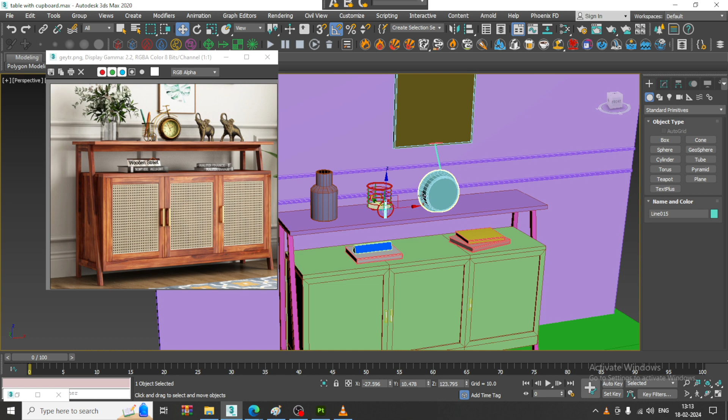Let's get started. As you can see, we have almost finished unwrapping here, with a few things left to cover. Let's select this, give it an unwrap UVW modifier, and assign it. Open the UV editor, select the polygons, go into mapping, and choose flatten mapping. Click OK, then go into tools and pack UVs.

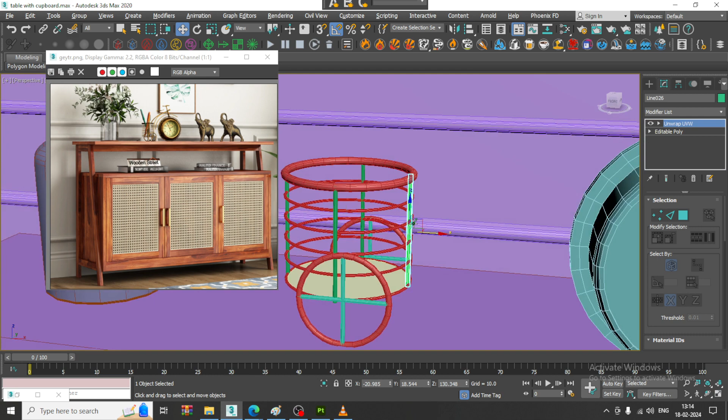Select this, delete this. I'll make a copy of it, press shift and drag. Let's make a copy, select this, again give unwrap UVW, open the UV editor, select the polygon, give flatten mapping, go into tools, and pack UVs.

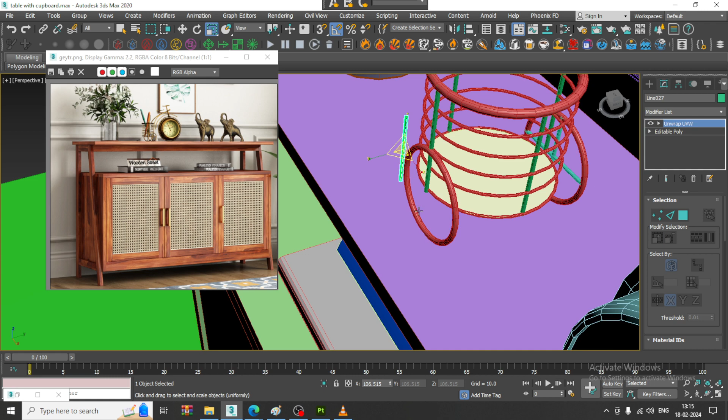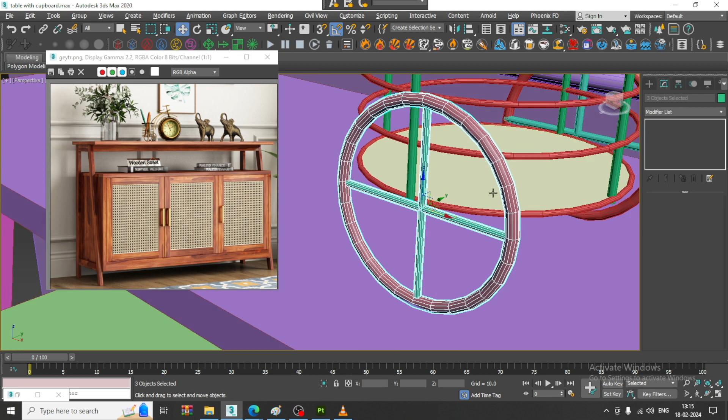Select this, delete it, drag it over here, resize it, push it up. Slightly drag it down, rotate it. Select this again, delete this, select this, shift and drag to make a copy of it.

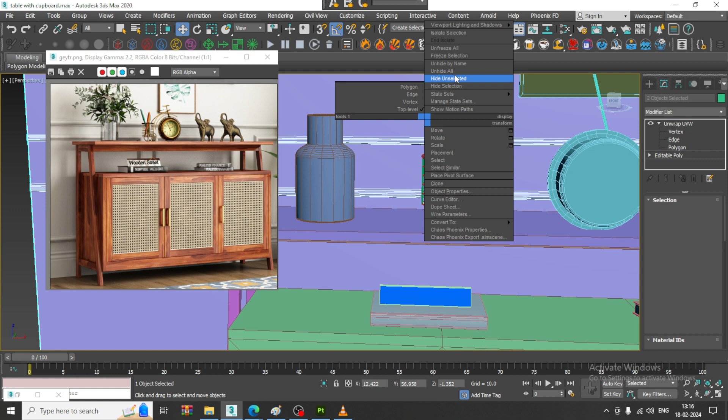Select the whole thing, I'll freeze it for a while, and let's group this. Go into the material, standard, and assign a color to it.

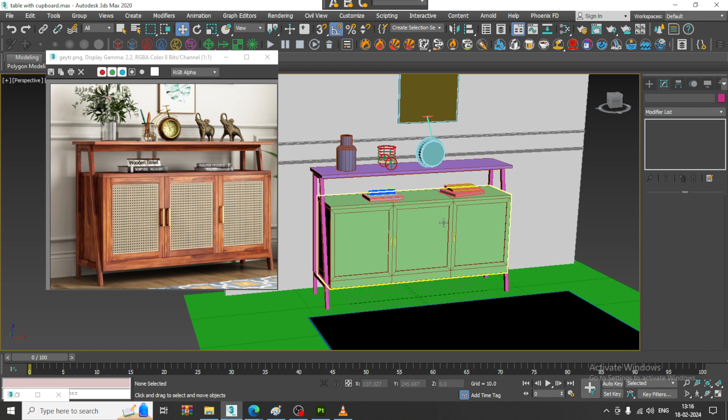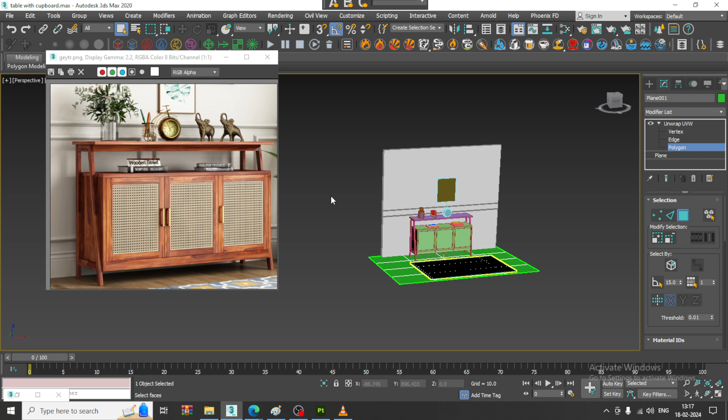Once this is all done, select the whole thing. We can go into file. Hope we have not unwrapped this - so unwrap this as well over here. Select the polygons, quick planar map, open UV editor.

Go into tools, pack UVs, unfreeze all, go into file, export selected. I'll export this in FBX format. Let's export it.

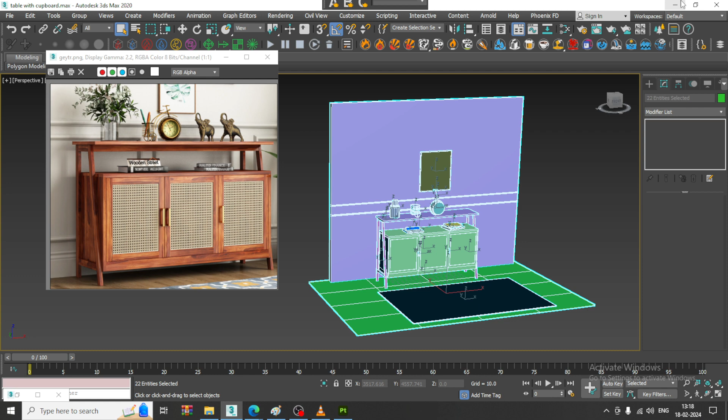Let's go over here, open the application Substance Painter. Let's take a new file over here. It's getting opened up.

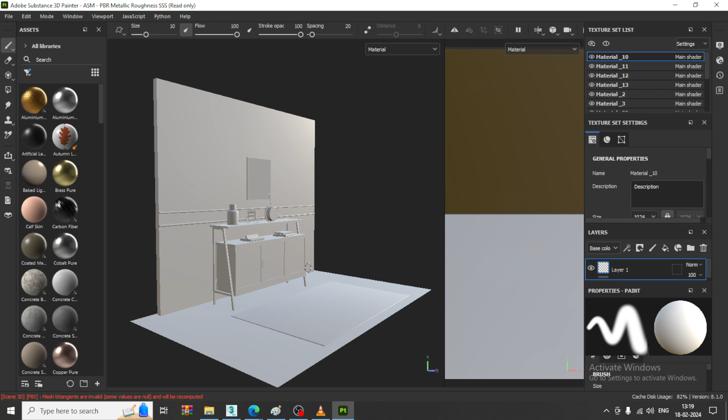Let's select this and call it. As you can see now, we have imported this stuff over here. We can rename this - it's very important that you rename all these elements. Let's double click it, say rug.

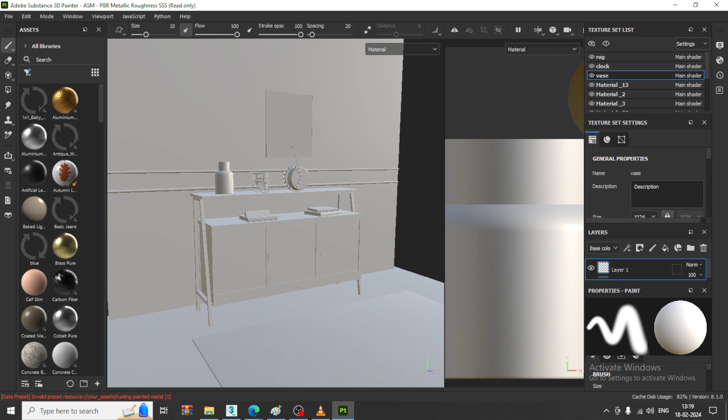I think this is a support, the handles, main table, the top, show, wall - you can just rename all these elements one by one. Book 1, book 2, book 3, nameplate, and the frame. I think we have missed out something.

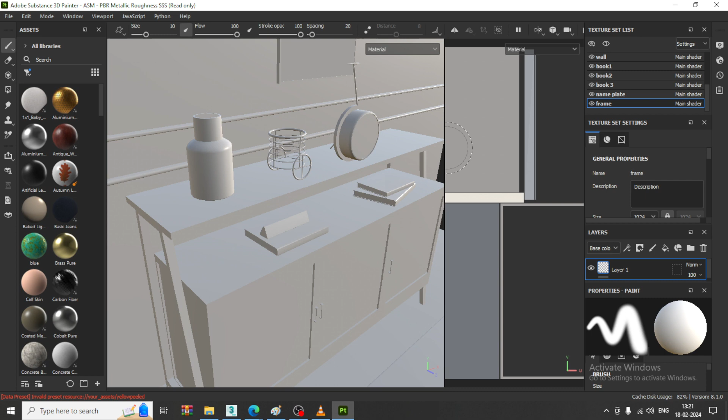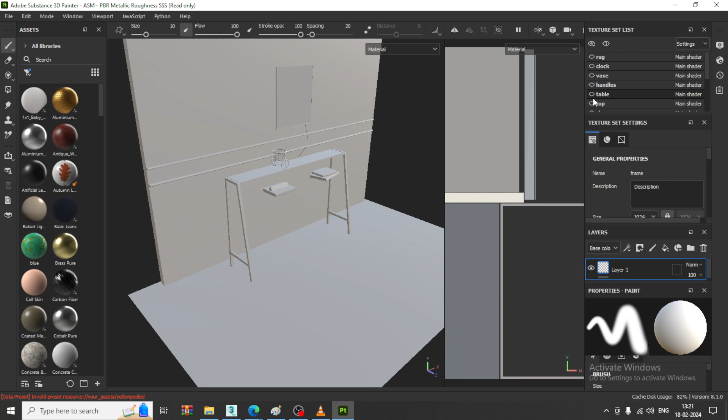Oh, it's taken as a whole element, so I haven't given any color to it. We'll definitely separate it later, or you can do it right now as well. So I have not separated it - you can separate this. So you can just separate this.

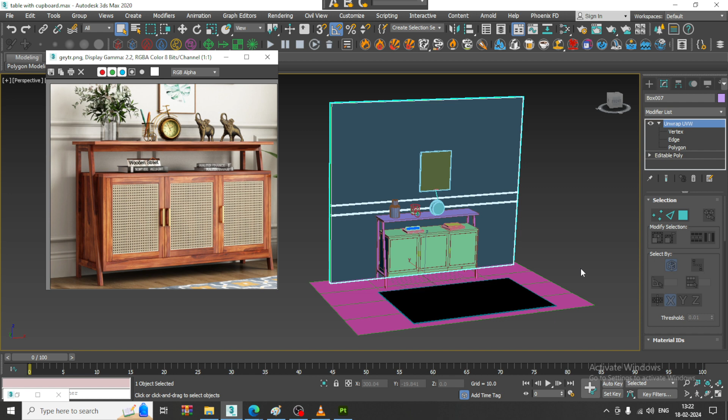Now you can again select the whole thing. Let's again click on export, selected, and let's name it table underscore 1. Save it in FBX format. Click OK, let's go to Substance Painter.

Let's click on new, select table 1. I'll discard this. Now I get this correct stuff. Now you get this rug, clock.

You can just rename all this - handles, even you can rename it over there as well - table, table, top. So that's your floor.

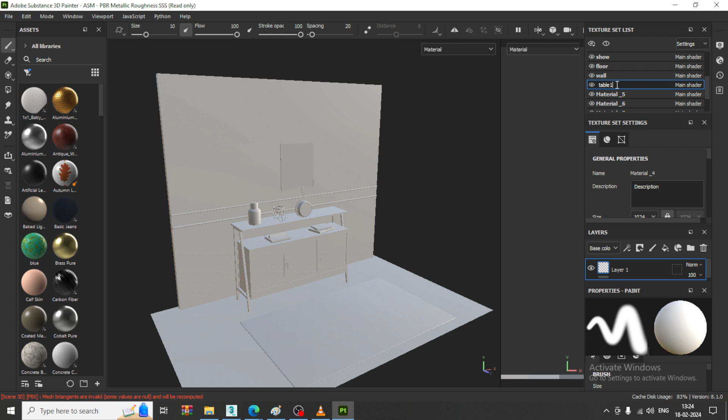Wall, table 1 - so you have unwrapped this. As you can see, we have done this again. Name it as book 2, book 3, nameplate, frame.

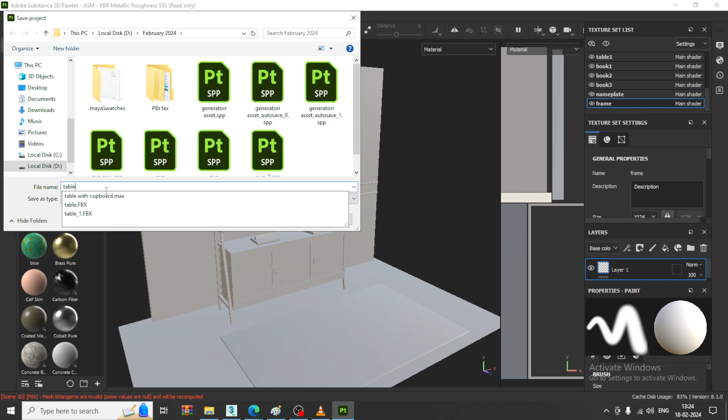I'll just save this file once over here. Table with cupboard. So what we can do is create a texture and assign it, or even if you had placed a plane over here, that can also be done - that's totally okay.

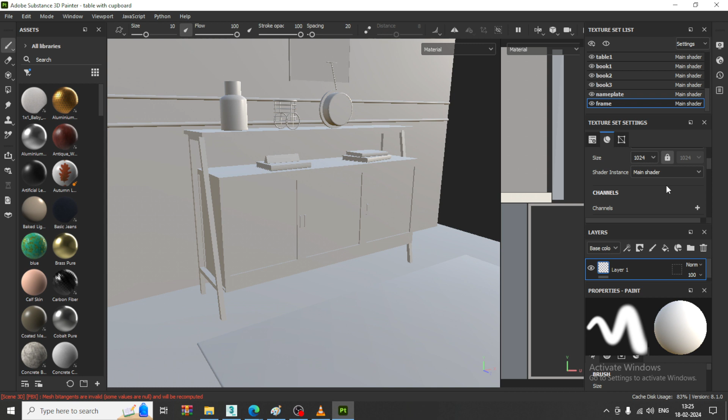Now let's go over here, into texture set settings, and let's bake these maps. I'm going to bake these maps over here, bake the mesh maps. Let's click over here - I'll bake it at 2048, or you can bake it to 4096, 2K or 4K, whatever you want.

So it's going to take time. I'll bake it over here like this. Let's click bake selected textures. Click on this.